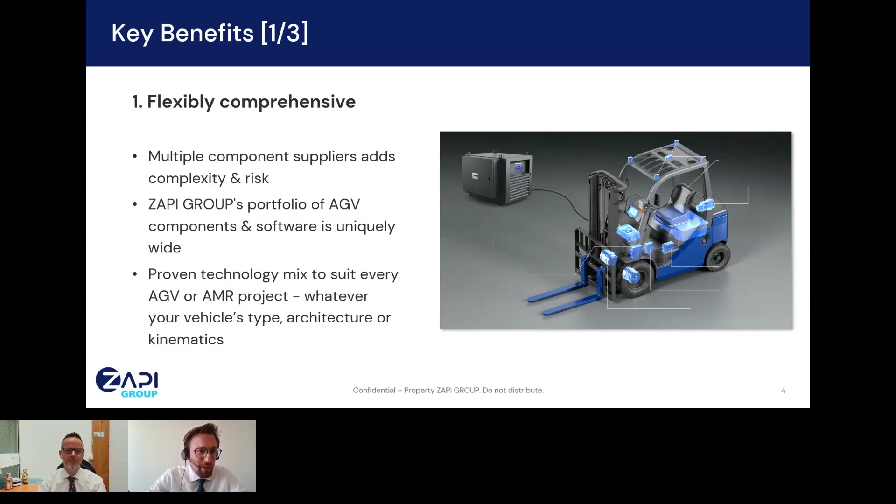I just ask you, Nicola, the pleasure to go on the next one. Thank you. Another important key benefit is the pre-configured aspect. It's not enough to have just components coming from the same supplier. It's an important benefit when these components are already pre-configured, already integrated, because in this way we remove risk, we remove waste of time.

Let's just make a simple example. When we have a navigation system that has to communicate with an inverter, if the two components are already pre-configured, we don't need to pay attention about CAN protocol or communication in general. We can use our time to be focused on other topics.

And this is another advantage of ZAPI Group, because you can take more components and the components are already pre-configured or pre-tuned. What does it mean? I take navigation and inverter, okay, communication is already done. I take inverter and motor, okay, we know how to characterize the motor.

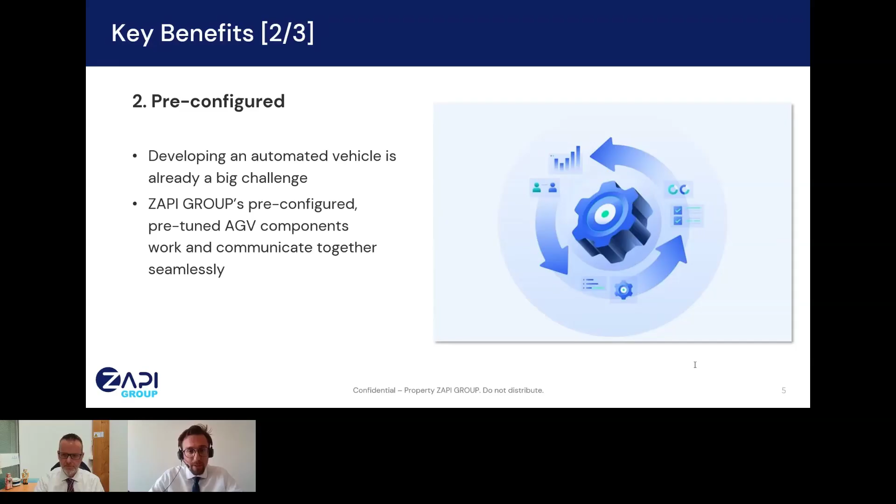I have a mixed fleet and I need a system for anti-collision or telematics, to put in the same ecosystem manual vehicles and automated ones. We have also this solution that is already integrated. And next slide.

Thank you, Nicola. By the way, ZAPI Group does not offer only components or solutions, we have also our experience. ZAPI Group is composed of people, a lot of technical people with huge experience. So can you imagine when you have to realize your first AGV vehicle, if you have the possibility to have a team of experts close to you, always available to support, to share know-how, and also sometimes to help you avoid some mistakes. This is one of our important features.

We have a mindset that is customer oriented. So we want to offer our support, especially thinking about the BlueBotics system. We have 18 months of support. For 18 months, you get free support from our technicians and visits on site. And we believe that this is we can give all that you need. Correct me, Nicola, if I say something wrong.

This is just a spot, some high-level information on why we believe that ZAPI can be the right partner for you. We have the component, we have the solution, everything is already pre-configured and tuned, and we have the people. Nevertheless, I want to remind you that we are not jealous. We are not the company that says if you take one component, you have to take the whole ecosystem. We are here to support you and give you what you want.

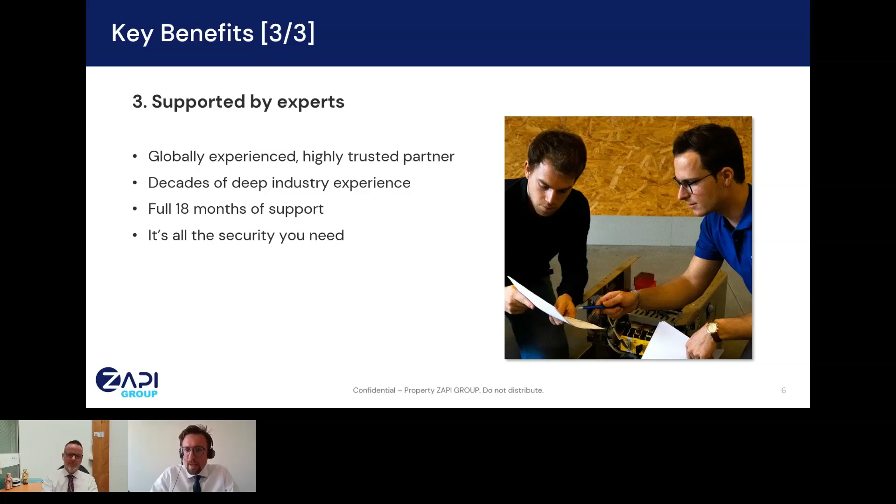And I think now probably I've taken too much time. Sorry for that, Nicola. I will hand over the stage to you to explain a little bit the solution we have. Thanks, Luca. No, you're not taking too much time because you do great work, and I will be faster.

So in terms of solution, what does it mean? We have the components, we have a need to solve, which is an application to automate. Now, how to automate it? Well, there are different vehicle types that exist, and you have to pick the right vehicle type for the right application.

Here you see some of the vehicle types. You can have fork vehicles, as you see here on the left. You can have under-ride vehicles, meaning vehicles that go under a payload and lift it to move it around. You can have towing vehicles, with carts in the back, or a unit load vehicle, where you put something on top. Depending on the application, you will choose the vehicle most suitable to automate.

Then there's also a question of what, in technical terms, we call kinematics—though our marketing team forbids that word, so we call it steering type. You can have what's called a tricycle: like the children's toy, with two fixed wheels and one turning and traction wheel. This is ideal for certain movements, generally big payloads and fork vehicles, because it adapts very well to the shape of a fork vehicle.

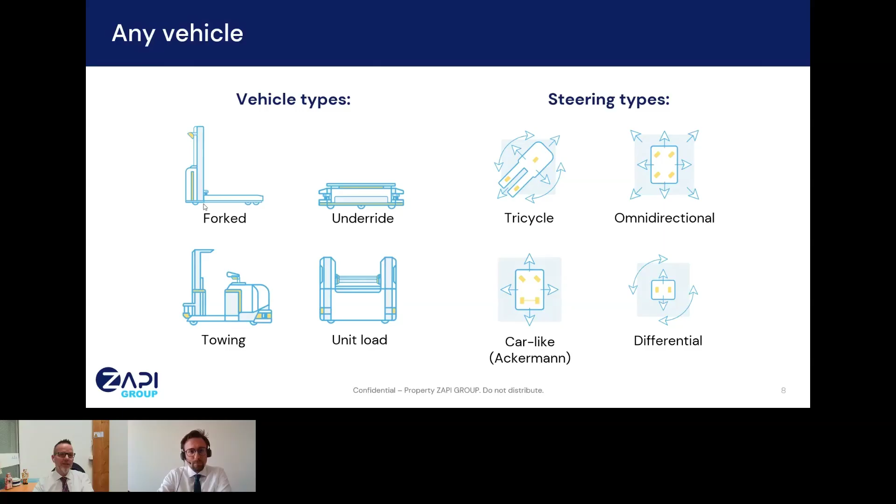Now, again, when we move from a manual vehicle to an automated one, what does it mean? Here we have components available at the group level. Let's start with the motors—of course you need motors to move a vehicle around, and you know that ZAPI Group is about electrical motors.

When you have electrical motors, you need inverters that control the motors and give them the right speed for the movement you'd like. You also have a battery—this is not sold by the group, but what we sell are battery chargers. On top of that, you can have options usable also for manual vehicles, like anti-collision, which detects things around and slows the vehicle for safety, and telematics, which gives statistics on usage for preventive maintenance or just to monitor how the vehicle is used.

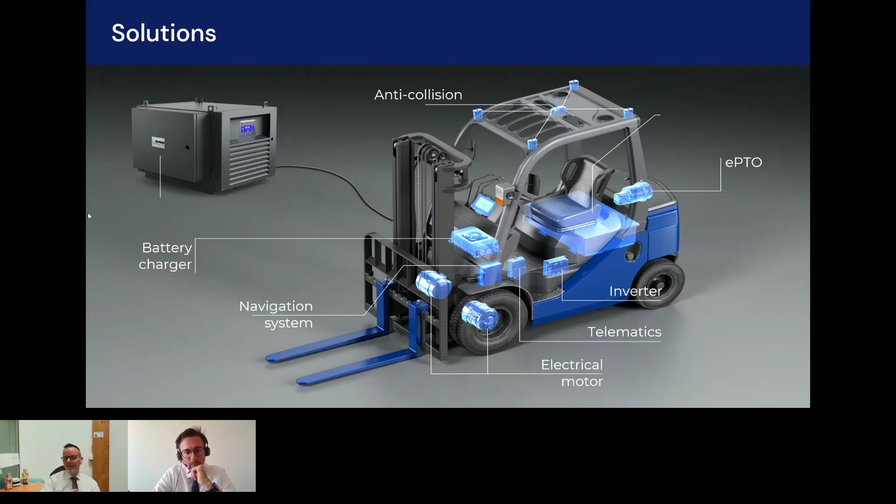Going to the next level, you can have a fully automated vehicle with a navigation system. So this is an overview of the components the group can provide to move from a vehicle that doesn't move without motors, to an electrified vehicle, then an electrified vehicle with more functionality like anti-collision and telematics, and finally to a completely automated vehicle.

Talking about automation, what we provide within the group is the navigation system from BlueBotics called ANT, which is a funny acronym for Autonomous Navigation Technology. What is special about this solution is that it combines being simple to use and easy to commission, allowing really fast commissioning compared to other technology, because you do not need to change the environment to use it. It's called natural navigation because it doesn't need a cable on the floor or tags, etc. So this is a bit the starting point.

But on top of that, the system provides software tools that make it really easier to do the commissioning. This is fundamental because commissioning is a big part of the cost for the end customer when he wants to automate. So quick commissioning is important.

There are other companies providing quick commissioning, but there are not so many companies or groups able to provide quick commissioning and real, accurate, and repeatable results. If I think about 10, 15 years ago, accurate and repeatable was kind of standard because you had either the cable on the floor, the tape, or the triangulation, and all of those were very accurate, but they were quite unflexible and heavy to commission.

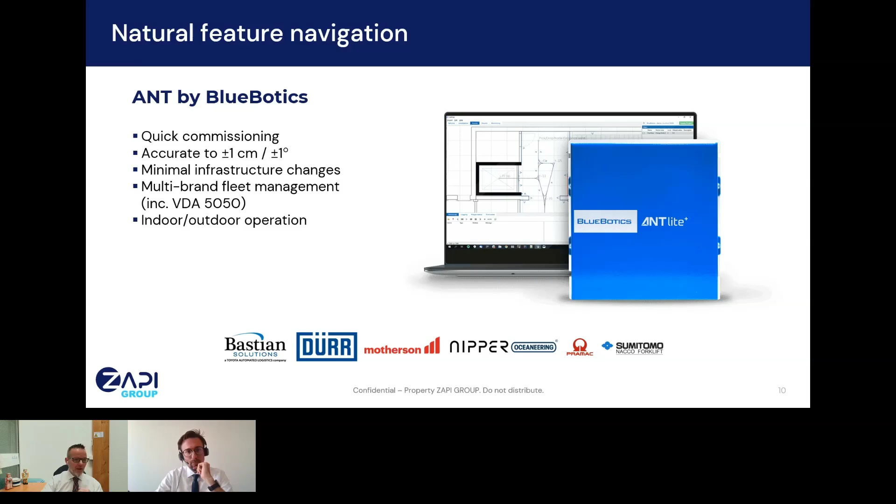Then we have, together with Ubiquicom, also an interesting solution that is requested more and more in recent times, which is about making manual vehicles and automated vehicles work well together. It's quite interesting because this problem exists since the beginning of automated AGVs, automated vehicles, because as soon as you have one automated one, it will have to interact with the rest of the world. But the request itself is coming more and more, I would say, in the last 2 years.

The impression I have is that in the past, the systems were more separated. Maybe it was a small part that was automated and all the rest still manual, while today there is more and more mixed operation that combines, on the same space, both automated vehicles and manual vehicles.

And this results in some challenges. The most typical example is a racking system with a dead end where you have a manual driver getting in to pick up a pallet, and then you have an automated vehicle that is not aware about where the manual vehicle is and enters the same hallway and blocks the manual driver. So both are blocked, and this creates delays and time waste, and therefore also money.

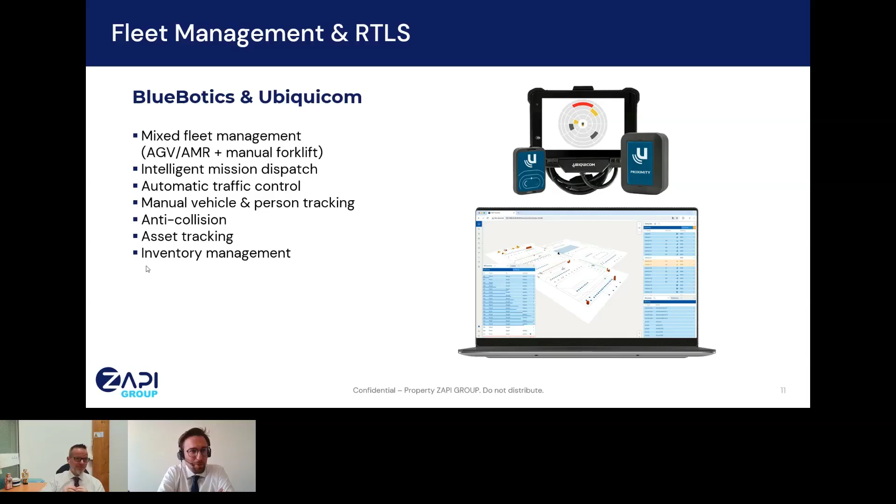Thank you so much. In ZAPI Group, we have two brands, ZAPI and InMotion, that provide motor controllers. It's important to start from the point that here we also have a wide range of portfolio components and huge experience. We started to produce inverters 51 years ago, and nowadays we produce 1 million inverters per year.

No matter the battery voltage, we have solutions from 24 volts up to 900 volts, and from 1.5 kilowatts up to 300 kilowatts. So we are pretty sure to have the components suitable for your vehicle.

Moreover, all our components can manage the most common motor technologies: asynchronous, permanent magnet internal, surface, brushless DC, synchronous reluctance. So the technology of the motor is not a problem for us. We are really flexible.

An important feature that we developed in the last 5 years was the introduction of safety functions, STO and SS1. STO is safe torque off and SS1 is safety stop 1. Both functionalities are in performance level D, following EN 13849.

This is especially important in AGV applications because, especially in Europe, we need to be compliant with 3691.4, which requires a specific performance level for the emergency brake. It requires performance level D, and this functionality can be used to stop the vehicle, or to ensure there's no current or torque in the motor.

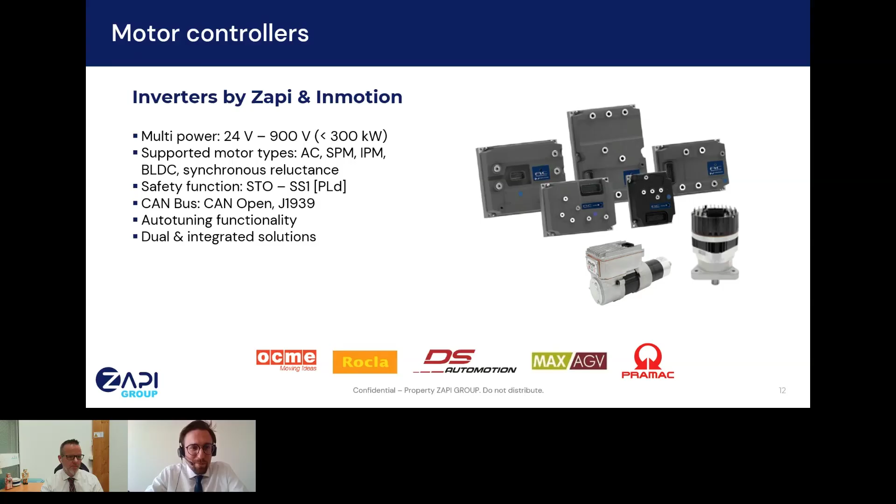Let's go on the next one. Thank you.

ZAPI Group produces a lot of electrical motors, more or less 400,000 motors per year. We have a specific business unit dedicated to the production of the drive unit, and we know that the drive unit is an absolutely important component in AGVs. We have various models, from vertical to horizontal to dual drive, and for each family we have different sizes. Just to give you an idea, the maximal payload accepted is up to 8,000 kilograms, and the maximal speed our solution can reach is 3.3 meters per second.

What's important to underline is that on AGV applications, flexibility is really important, so it's pretty impossible to have just one component in stock suitable for all vehicles. Every customer has specific needs and requires specific customization. So it's important to be flexible while continuing to guarantee quality and performance. This is one of the key points of Schabmueller, because they can customize the drive unit as you wish: working on the motor, changing winding, putting one or two electrical brakes on top, creating extended shafts to connect safety sensors, modifying the fixing plate or modifying the wheel.

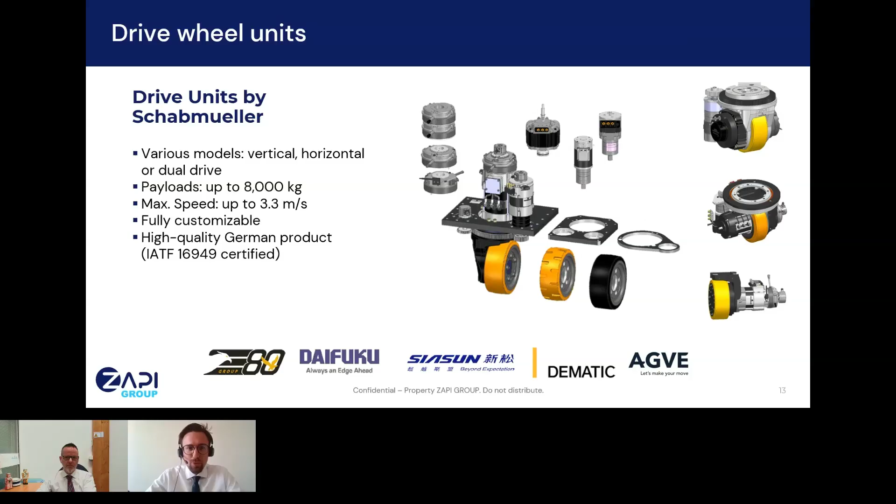Next component is the battery charger. In this case we have three companies: Delta Q, Zivan, and Stercom.

Again, we have no limitation about power, with solutions from 350 watts up to 88 kilowatts, and as output voltage we go from 24 up to 900 volts. Thanks to these three companies and our historical experience, we have products suitable for different battery technologies: lithium, lead acid, supercapacitor, and we also cover a lot of BMS protocols. So I'd say we are already today more or less compliant with all the BMS present on the market, and compliant with all batteries.

If you find a battery not yet introduced in our software as a BMS communication, it's not a problem - we can customize our software and introduce the communication. Also in this case, the component is CAN-based, so CANopen or J1939. Probably the most important value of our product is global certification, so no matter where you are in the world, we are present with our sales team and have a huge quantity of certifications. We know our product will be sold all around the world.

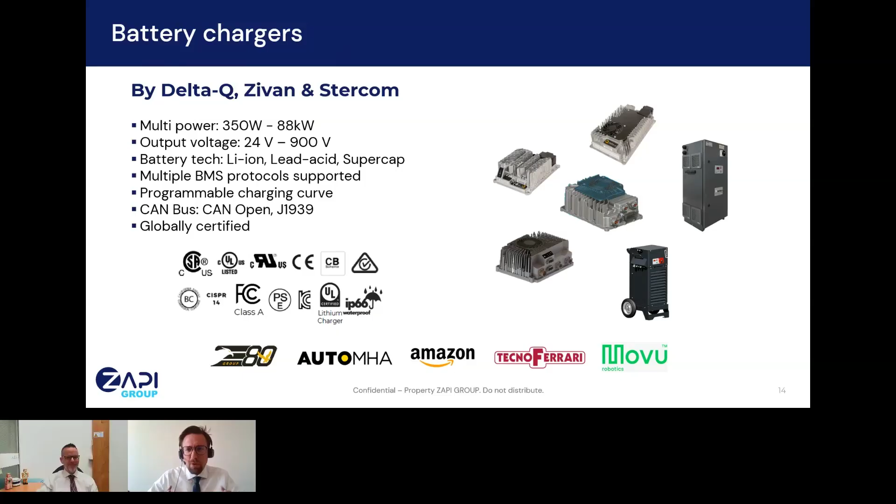And again, sorry if I take too much time. I believe we've talked probably too much about components now - let's see some real examples.

I'll step in just to give two examples of vehicles automated, so electrified and automated, with our technologies. Here, for example, we see a tugger - a kind of airport tugger, but also used for automotive applications, from the Spanish company MOVVO. In this case the vehicle can work both indoor and outdoor and can transport up to 25 tons, full load.

In this case, the drive unit is a Best Motor with ZAPI EPS for steering. Then the inverter is a DUALACE2 new gen from ZAPI, and they are all connected by CANopen with the BlueBotics ANT lite+ system. And again, using the fleet management I referred to before, our universal fleet management system, which allows - I repeat - different vehicles to work together.

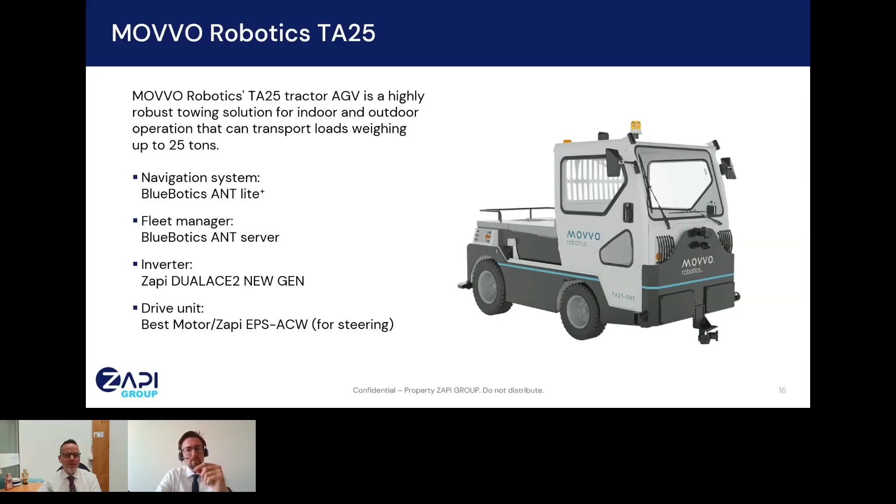Talking about that, here's another example of a vehicle automated with our system, where we have a ZAPI inverter, the new generation, natively connected with CANopen to the navigation system. It's a forklift - Pramac is known not only for MotoGP, for those that know MotoGP, I'm a big fan, but also for forklifts. They deliver a big amount of forklifts around the world, and they started automating their own forklifts about 2 years ago.

Now having more and more traction on the market with these fully automated vehicles. They use ZAPI inverters in general, also for the manual ones, and they keep the same setup for the automated version. They have 3 different vehicles for this.

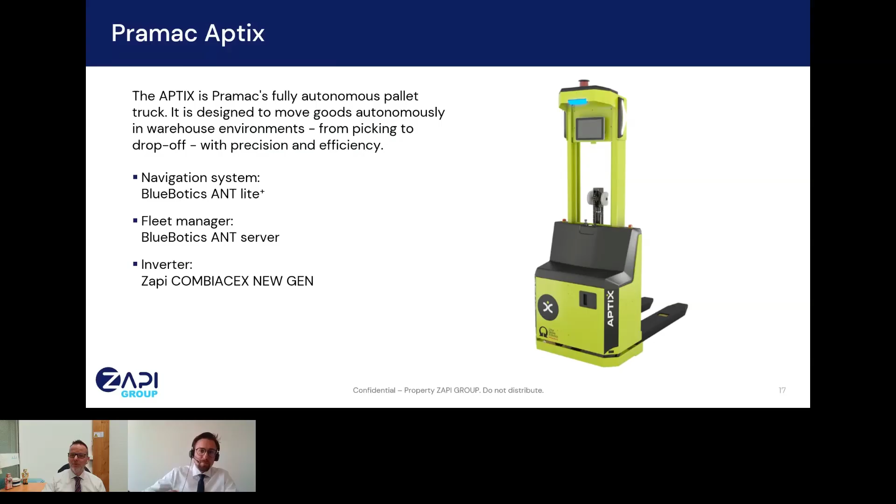Now, in terms of architecture, I let Luca explain the details because he's more technical than me. Thank you. Yes, the first important thing is that this is just an example of an architecture of a tricycle, because we saw before an example, and now we want to give you an idea how our components can interact, so if you want to realize a similar solution, what you should have to do.

So if we start from the drive unit, again, ZAPI Group can offer a vertical drive unit like this case. We need two inverters, one for steering to close the position loop, and one combined inverter for traction and pump application. If you look at this schematic, you see that it's just enough to connect the CAN bus to BlueBotics.

As we said before, the protocol is already implemented. So in this case, BlueBotics is the real brain of the vehicle, is the one that localizes and navigates the vehicle in the space. And the two inverters are like a dummy component, so they receive the set point and do what BlueBotics requires.

For sure, for every AGV, it's important to have also some safety component. I'm thinking of the laser scanners that are the eyes of the vehicle, used also for navigation, but they are also used for safety.

And due to the fact that our vehicle has to be safe, we always suggest a safety PLC on the vehicle that is the real control of the safety of the machine. One of the advantages of our component is that, for example, you can connect directly the safety system to STO SS1 functionality. In this case, a typical example is the vehicle is driving.

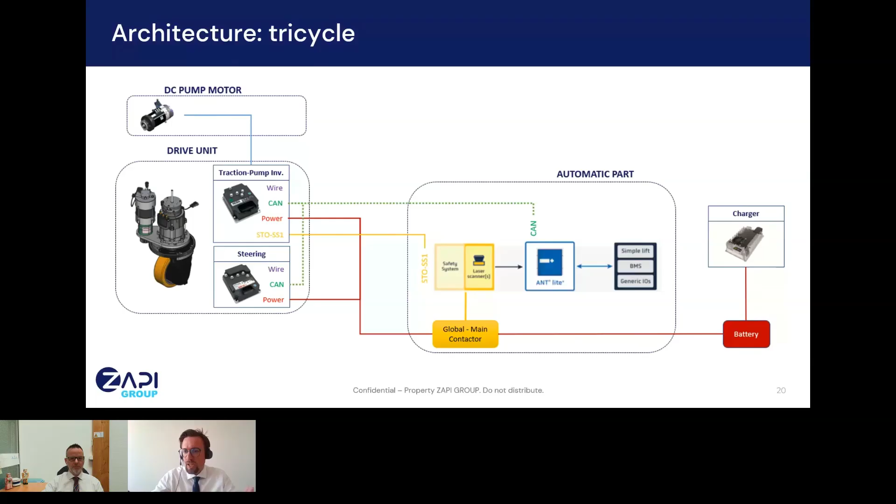Now let's jump to the next slide that is a little bit more complex, but not too much. Here the idea is to do a car-like Ackerman hybrid vehicle. Hybrid for me means that it can work manually and can work in automatic mode. So let's start from the manual part.

You are going to connect directly the steering and the gas pedal to the inverter, because in manual mode, let's say, the logic for all the movement is in the inverter. Thinking of a typical car application, we have two traction motors, one differential for the front left and one for the front right wheel, and one steering.

As soon as my vehicle wants to move from manual to automatic mode, okay, also in this case, BlueBotics, that is again the brain of automatic mode, takes control, calculates the set point, and communicates via CAN what the inverter has to do. The inverter automatically stops following the manual command and starts to follow the information coming from CAN.

You will see a small difference compared to the previous functional scheme. We put in the middle the customer PLC as optional, so this is not mandatory. I mean, if you want, you can directly connect BlueBotics to the inverter if you want to realize this vehicle. But sometimes customers prefer to have a PLC in the middle. This gives them more flexibility if in a second stage they want to change maybe the inverter with a competitor, or they want to change the navigation, because the PLC works as a gateway between the two parts.

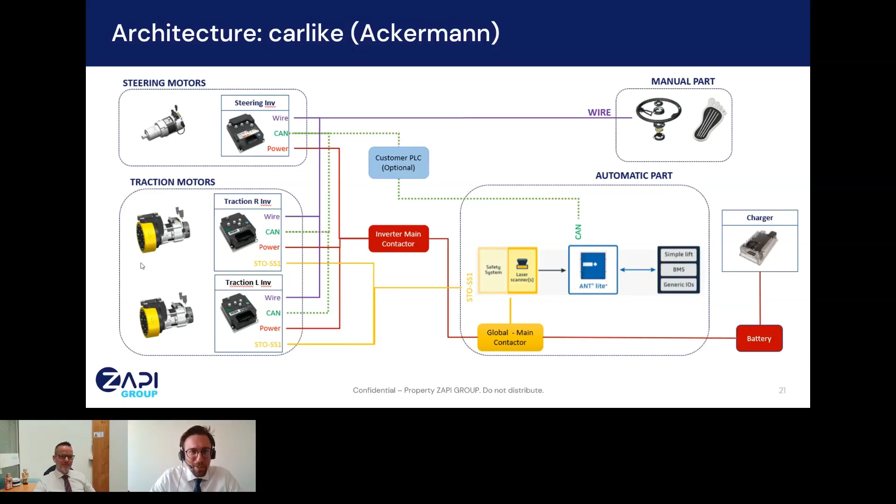I hope I haven't been too technical and confused the guys connected right now. Well Steve, it's a mistake to worry about that.

So now the idea is that we have presented to you what is an automated vehicle, which components you need for that, and which components ZAPI Group can provide. Now the question is, if I want to start automating a vehicle, what should I know, what should I do, or what should I avoid doing?

That's just a short discussion around this topic, where we have put together five statements about this.

The first one is, if you want to automate a vehicle, you have to keep in mind you are not automating a vehicle. The goal is to automate an application. So it's fundamental to know the application.

Very basic ideas: what do you want to move? Is that a pallet? Is that a box? What is the weight? At which level, is that floor to floor? Is that at a certain height? Depending on all these parameters, you will have to approach the application, the automation, in a different way.

Is the floor completely flat or not? Is it wet? Is it dirty? In terms of acceleration, in terms of which wheel, which drive, motor drive, etc., this will be different.

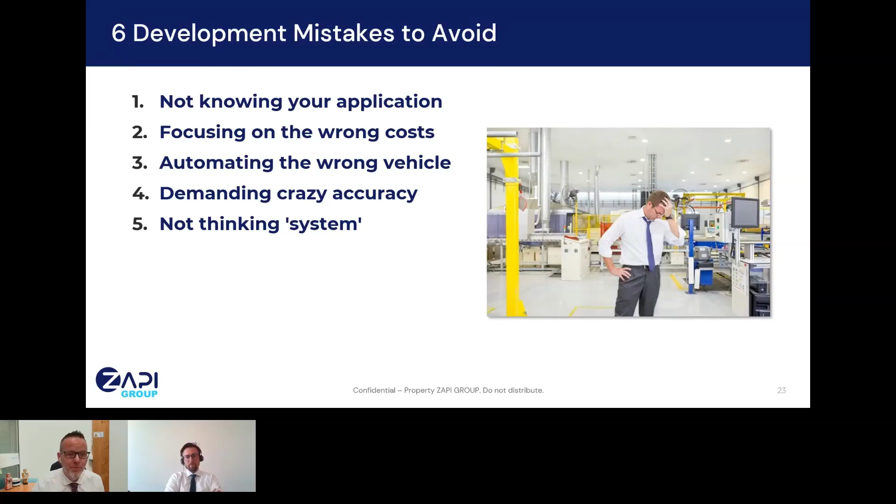And now I think we have to move to the summary, then to the end. So, well, the summary - I would say we did it there. We went through the AGV, the components, how ZAPI Group can supply these components, and the errors to avoid. Do we accept questions? How does it work, Rachel?